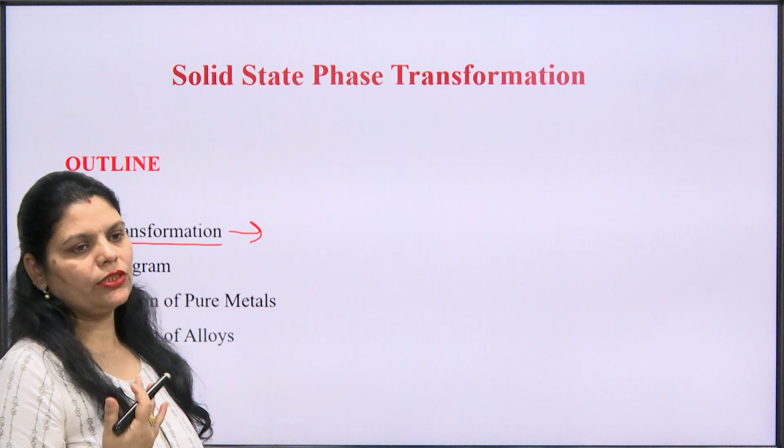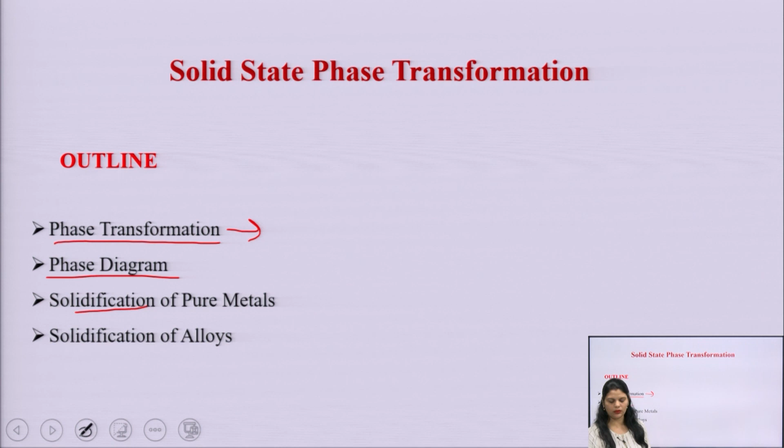So, in today's lecture, we are going to start the solid state phase transformation, which is a very important topic. In this lecture, we will discuss phase transformation, how the metal will change from one phase to another phase. Then we will discuss the phase diagram, that is the iron carbon phase diagram, and after that we will discuss the process of solidification in both cases, in the pure metal as well as in the case of alloys. Okay.

So, first we will start with the solid state phase transformation. When we talk about solid state phase transformation, we should know what we understand by phase transformation. Basically, phase transformation is a process of change of one phase to another phase.

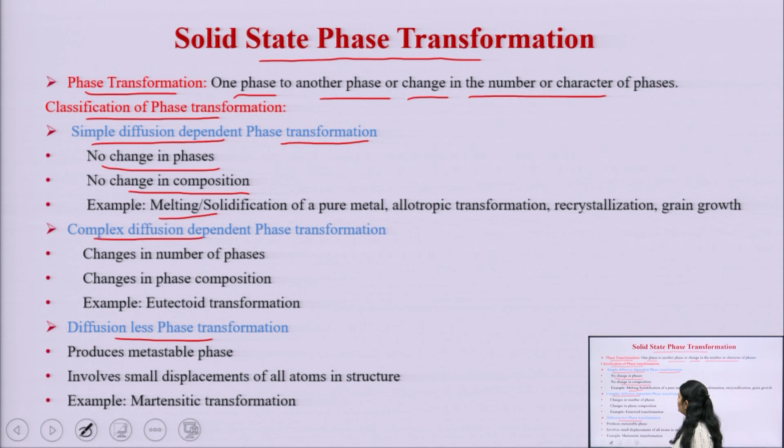So, in the case of pure metal, the composition is same at all the places. So, if we talk about the melting or solidification of the pure metal, then it will be the case of simple diffusion phase transformation. Okay. And the other examples are allotropic transformation, recrystallization or grain growth. So, these are the examples of simple diffusion phase transformation.

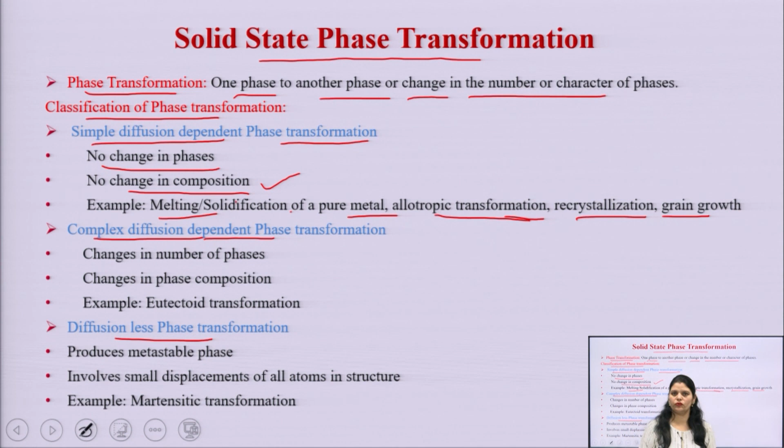Next we come to the complex diffusion dependent phase transformation. In this case there will be change in the number of phases, means phase will change from one form to another form, and there can be a number of phases. And there will be change in the phase composition also. In the first case there was no change in composition, but in this case there will be change, and we can take the example of the eutectoid transformation, where the phases as well as the composition will change.

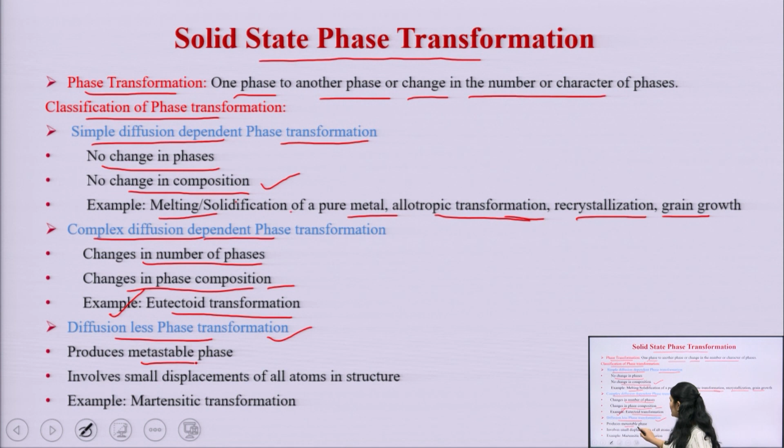Next we come to the diffusionless phase transformation. In this case it will produce a metastable phase, and it will involve small displacement of all atoms in the structure. Means within the metal's structure, atoms will be displaced at a small level. These are the two characteristics of diffusionless phase transformation, and the example is the martensitic transformation. So, in this way we can classify the phase transformation process.

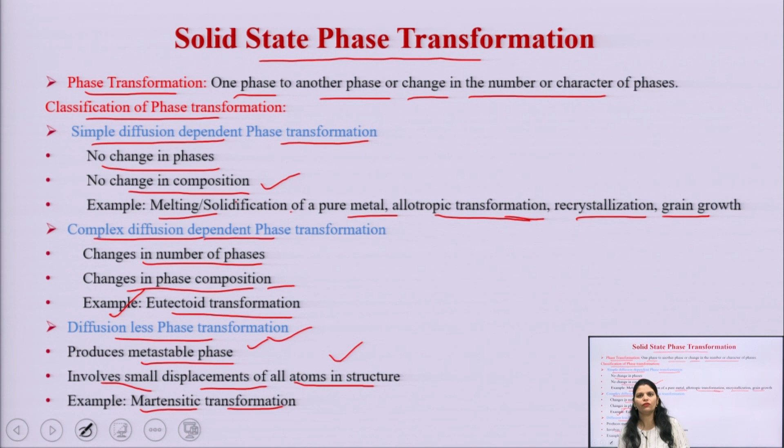Next we come to the iron carbon phase diagram. Here we will talk about iron and carbon. In the iron carbon equilibrium diagram or phase diagram, we know that iron is allotropic in nature. What do you mean by allotropic? Allotropic means it will be present in different phases; the form will be the same, iron, but the phases will be different. We will find it in different phases.

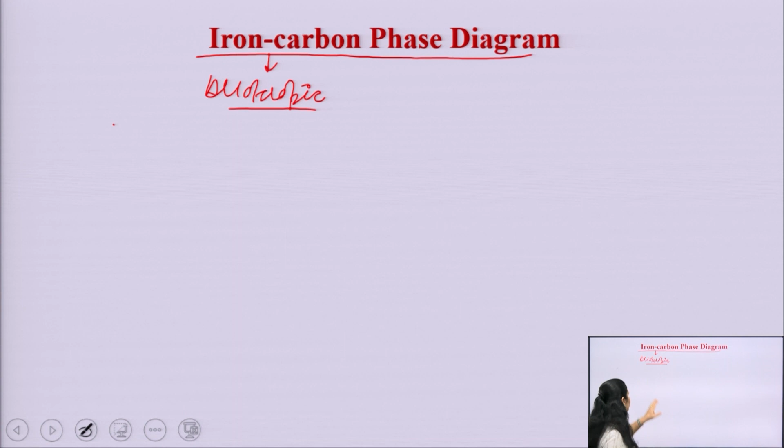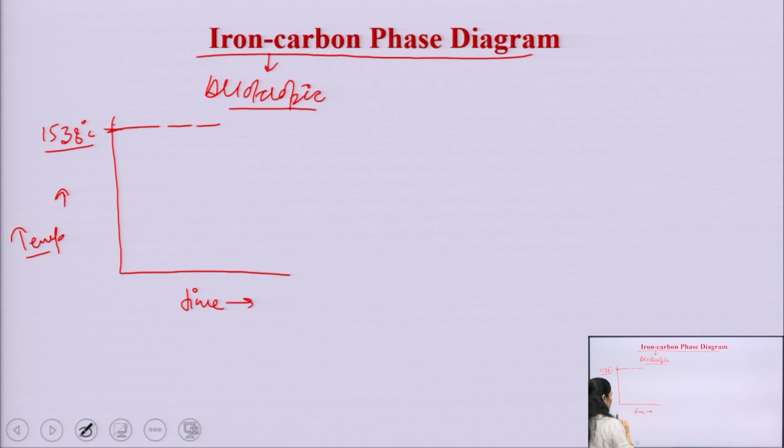How can we understand this in a simple way? Before drawing the iron carbon phase diagram, we will discuss the allotropic nature of iron. We can draw it like this. We are taking temperature along this axis and time along this axis, plotting temperature versus time. At 1538 degree centigrade, the iron will be basically in the delta form. Here it is in the liquid state.

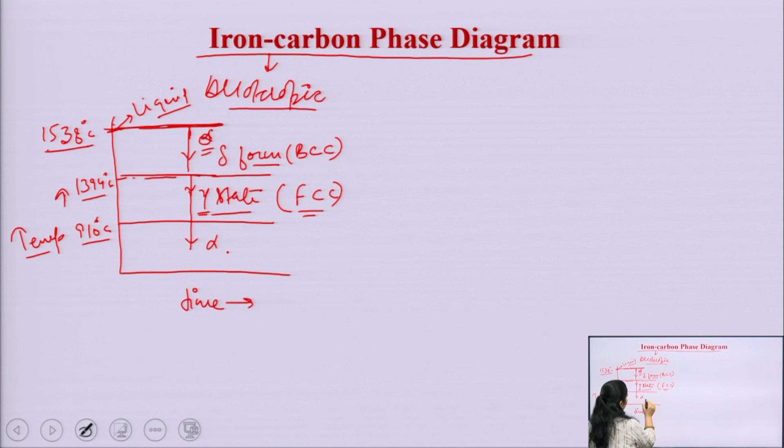So, between these two ranges, means 1394 degree centigrade to 910 degree centigrade, it will be present in the gamma state and its structure will be FCC. अब अगर 910 डिग्री से बिलो इसको कूल डाउन किया जाता है तो it will be present in the alpha state and its structure will be same to the BCC.

Okay, and यहाँ पर जो हमें आयरन मिलता है उसको हम बोलते हैं ferrite. This alpha state and this delta form both are having the BCC structure. So, we can say here we will get ferrite, here also in alpha state. So, these are the different phases at the different temperatures of the iron. Iron state में है but structure change हो रहा है, one phase से दूसरे phase में transform हो रहा है. So, this is the allotropic behavior of the iron.

Okay. Now, we come to the iron carbon diagram. So, basically we are taking the pure iron and after that हम कार्बन को ऐड कर रहे हैं. अब कार्बन को कितना ऐड कर रहे हैं? अगर यहाँ पे प्योर आयरन है और यहाँ पे हम कार्बन को ऐड करते जा रहे हैं, this is the carbon percentage.

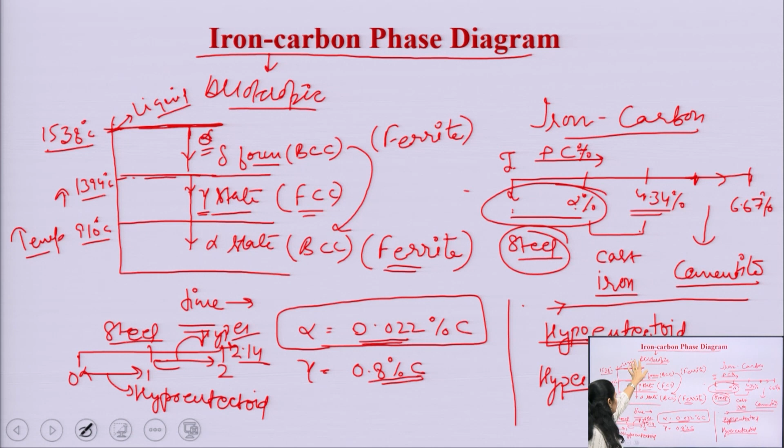This will be hypoeutectoid, and 1 to 2%, या 2.14 तक ये जाता है, here we will get the hypereutectoid. We should know all these terms before studying the iron carbon phase diagram. These are the two terms which we will use in the iron carbon phase diagram.

Now what we will do, okay. So these are the terms. One more, now we will draw the iron carbon phase diagram. So I am drawing a rough diagram and in the coming slides we will discuss the complete diagram. Okay.

So here we have seen some temperature ranges like it was 1538 degree centigrade, okay, and then we had 1394 degree centigrade, then we had 910 degree centigrade. Okay, these were the three ranges and here we can take one temperature that is between these two ranges and it is like this.

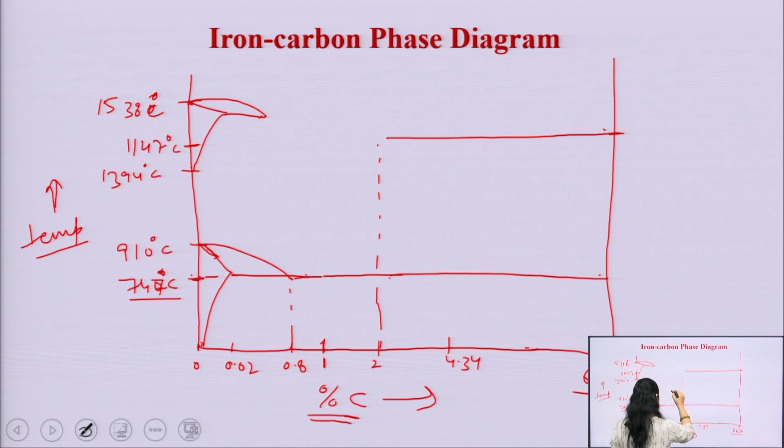And this line will come like this, okay. After that one more line will be from here, okay, and it will be

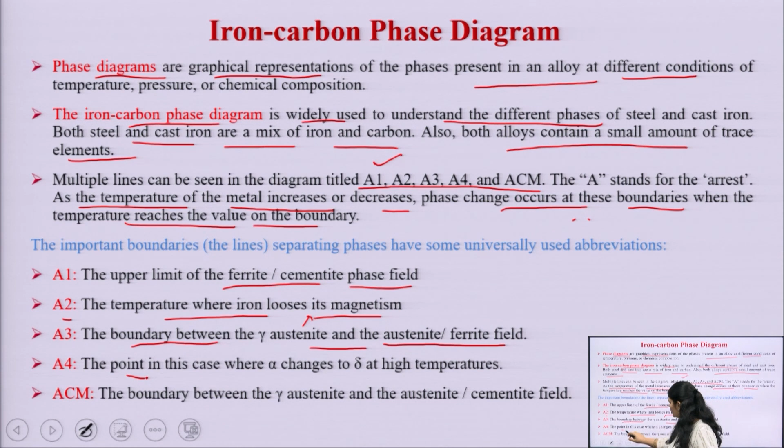A1 will show the upper limit of the ferrite and cementite phase. A2 will show the temperature where the iron loses its magnetism. A3 will show the boundary between the gamma, which is called austenite, and the ferrite field. A4 will show the point where alpha changes to delta at high temperature, and ACM will show the boundary between the gamma and the austenite-cementite field.

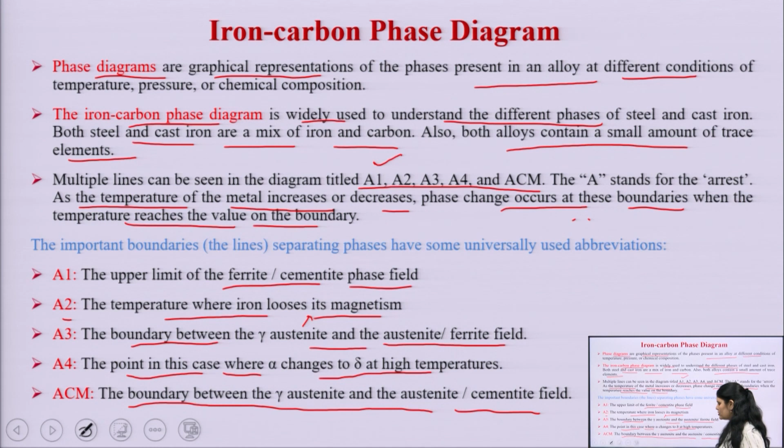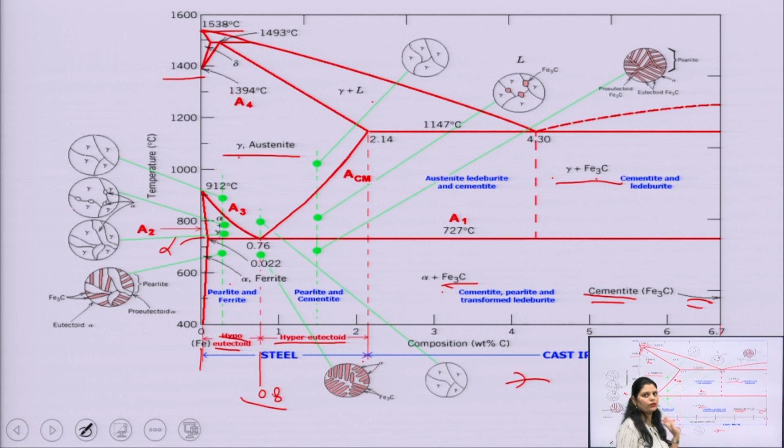So this is basically the phase diagram. Now we will discuss the solidification of metals.

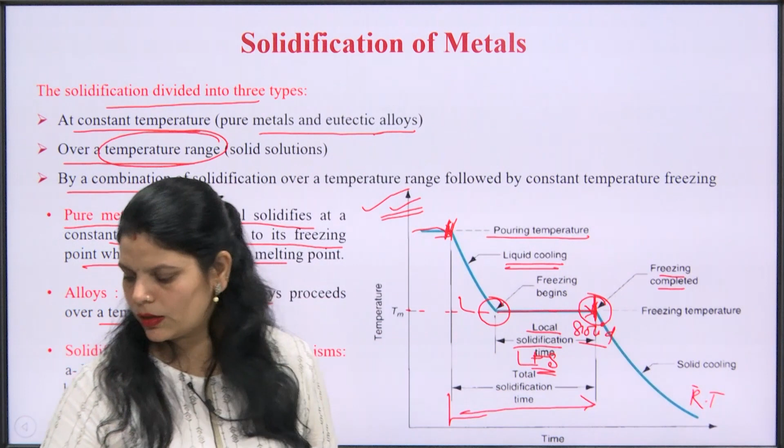Now we will see this term, the undercooling or supercooling. So if we talk about the pure metal, then this term will come, undercooling or supercooling. इसका मीनिंग क्या है कि basically we will lower the temperature of a liquid or a gas below its freezing point without it becoming a solid. Means इसके freezing point से भी नीचे तक इसके temperature को ले आएंगे। क्यों ले आएंगे? So that the nucleation can take place.

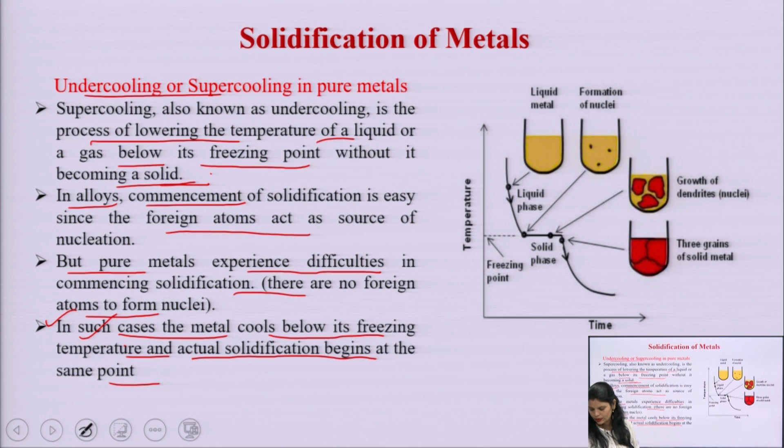Next we come to the solidification of alloys. So here in this case, first we will understand this. We are taking two metals, nickel and copper, and this is the temperature. We can see here its temperature is 1455 degree centigrade and its temperature is 1083 degree centigrade. So the nickel is in the liquid state here and the copper is in this liquid. So here we are adding the copper in the nickel. As soon as it is added, we can see that its temperature is declining.

So above this is the liquidus line, and the alloy will be in the liquid state above this liquidus line, and this combination of nickel and copper will be in the solid state below the solidus line, and in this phase we will have liquid plus solid. So in this graph, this is the pouring temperature, this is the cooling of the liquid, and from here the freezing will begin, means the solidification process will start at this point, ठीक है। This will be the transition phase, liquid plus solid यहाँ पर होगा।

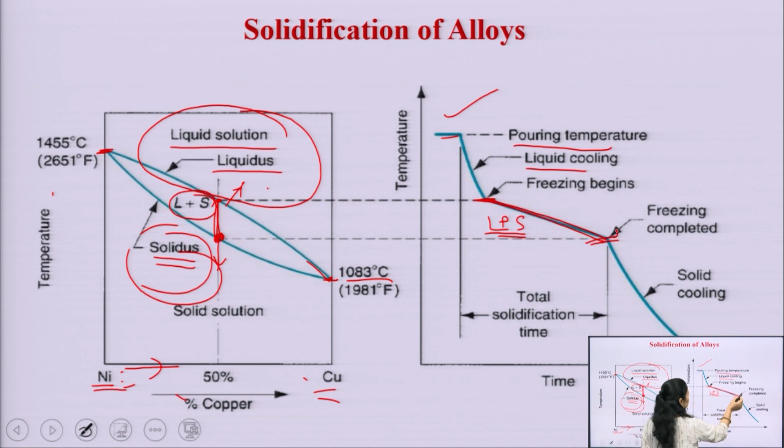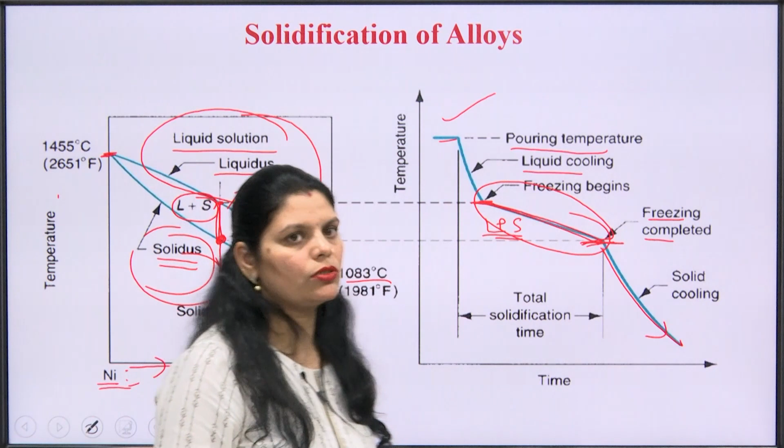So we can see here it is not a constant line, it is solidifying over a range of temperature, and here the solidification will complete at this point, because below this point all the combination of nickel and copper will be in the solid form. So at this point the freezing will complete and we will cool the alloy to room temperature. So this is about the solidification of the pure metal and the alloys.

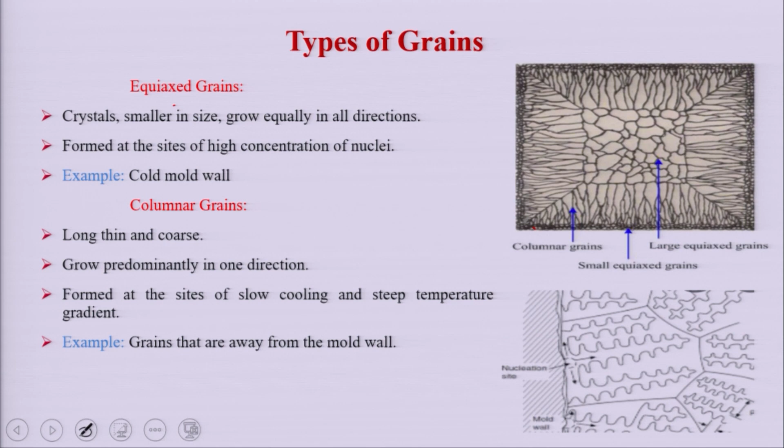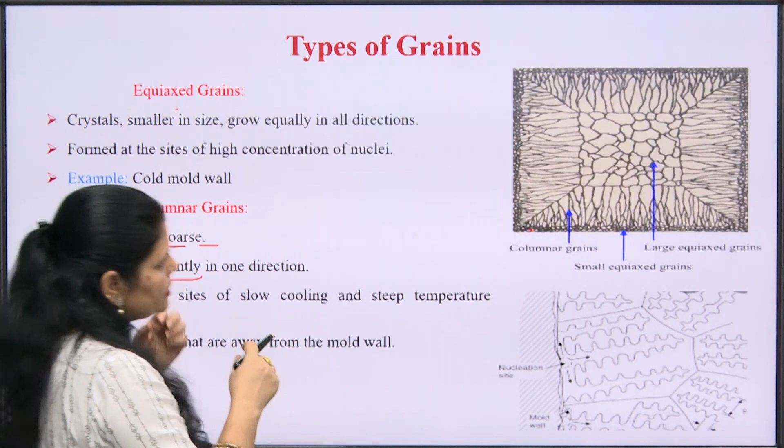Now we can have different types of grain also. For example, we have two types of grain, equiaxed and columnar grains. In case of pure metals, we have the equiaxed, which are small in size and formed near the boundary of the mold wall. And these columnar grains are large in size, thin grains, and these grow in one direction, which is opposite to the direction of the heat transfer. So these are the columnar grains and these are the equiaxed grains.

In case of the alloys we have this type of grain structure, and these are called dendrites, and these dendrites are three dimensional. These are formed because different temperatures are present here, because we have a combination of metals here, so these have different freezing points. Because of this the grains grow in three directions, so we form dendrites in case of the alloys. So these are the references.